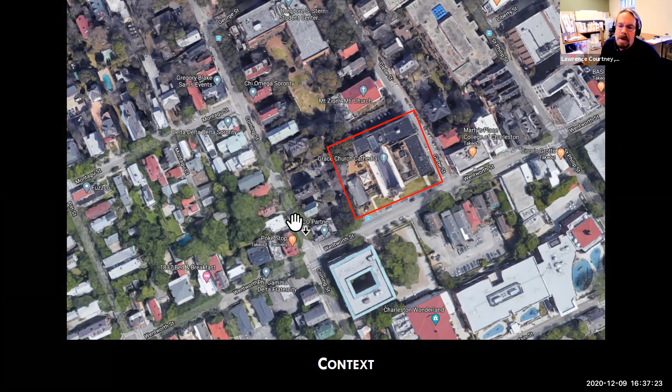Some context photos: this area shows Wentworth on the south, Glebe Street on the east, and Coming Street on the west. This is the site of the new addition, the cathedral on the right here.

This has been approved for demolition by the board previously. Larger view of the site here, looking east on Wentworth, looking west on Wentworth. This is the site right here.

Previous staff comments: the previous motion was conceptual approval with board and staff comments, on September 9th of 2020. Previous board comments, which I will paraphrase a little here.

One board member appreciated the attention to detail and how the applicant adapted the design to show these details using technologies and models to address many of his concerns. He visited the site, looked at view corridors, and walked Wentworth Street, and thought the modifications significantly improved the project. The church is still substantially visible to the public and can be appreciated by all, even though the applicant is adding this addition on the west side.

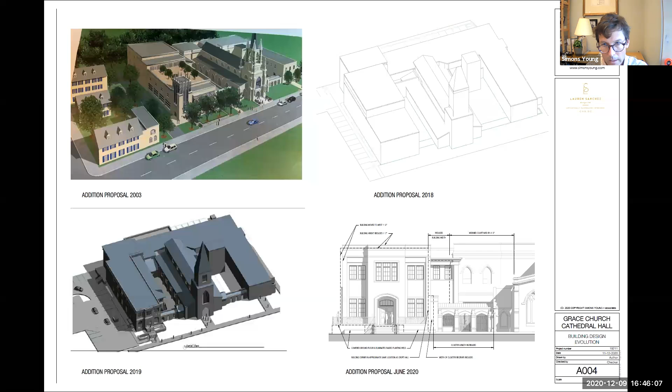Sheet 4 shows the evolution since 2003. Sheet 5, we can skip to the next—that's the diagram showing the new building and its relation to the campus, its massing, and how it completes the composition of the buildings.

On sheet A100, the site plan shows similar information. You can see Croft Hall as the dashed line there in the middle of the Cathedral Hall—that's what's being demolished. Parking is on the left, and also on the northeast side of the campus and upper right. And then the playground for Grace Little School, which is housed in the older part of the building, and also used for Sunday school.

Sheet A100A, the landscape plan, shows the courtyard hardscape design. We do have a landscape architect with us tonight if you have any questions. The idea we want to show, which you haven't seen yet, is that we're going to put some trees in front of the new building, similar to what's in front of the Johnson building, probably some crepe myrtles, and a full canopy shade tree will go in the playground.

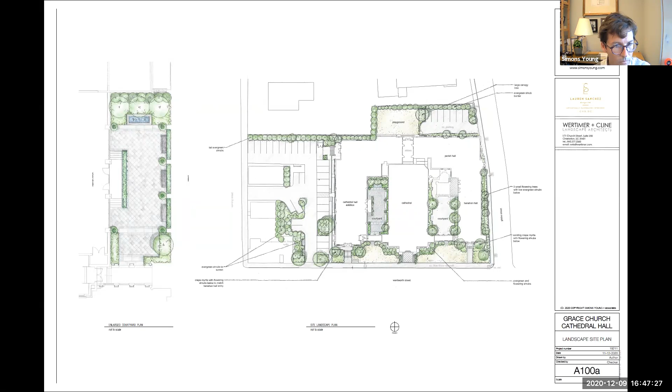Sheet A101 is the first floor plan, showing Cathedral Hall with the alignment of the main windows and columns with the stained glass windows of the cathedral. So we're translating that original design of the cathedral through the Cathedral Hall. The service functions are in the rear, there's a landing out front, and an ADA ramp going to the front and rear. There's a one-story section of the building where the kitchen resides—it gets shorter as we get closer to the cathedral, which is generally a strategy to be more deferential to the cathedral as you get closer to it.

Sheet 102 shows offices for the administrators and the clergy. These are moving onto campus with this plan—currently they're on another block down the street, so that's a nice thing for the church. There are accessible facilities to serve the second floor, and a clerestory space that looks out on the cathedral, speaking to the importance, from inside the building too, of picking up the cathedral and using it as the main feature of the building.

Sheet A103—oh, I'm sorry, on 102 there's one more thing. There was a roof, which we're now turning into a roof deck off that conference room. We'll look at that in elevations and street views—that's in the model, and it'll be most useful to see in a section.

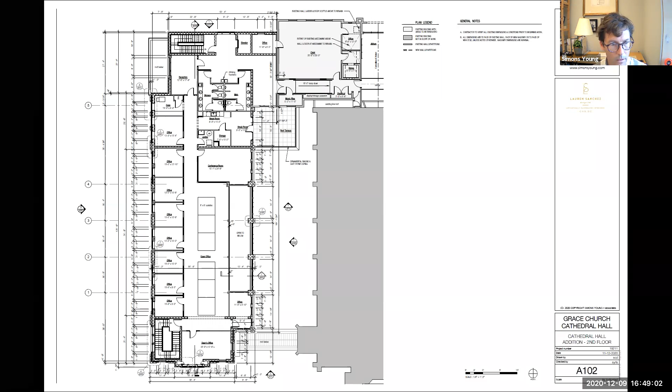Sheet A103: okay, so there are the mechanical screens—we've pushed them as far away from the street and as close to the center of the building as we can. There's a simple detail on the upper right-hand side showing the aluminum mounted on galvanized posts. Sheet A200—yeah, great, the streetscape showing the massing of the building.

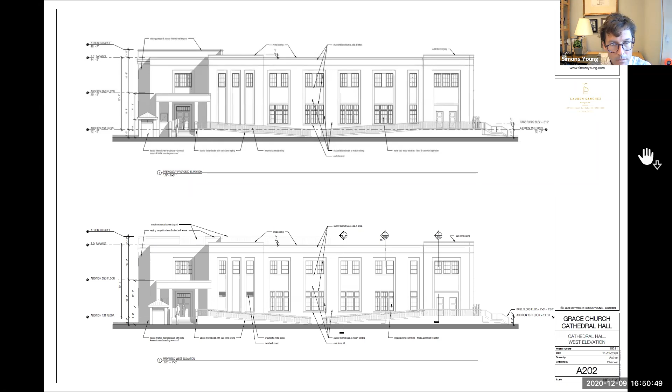Sheet A203. The section and the east elevation.

There is a change to the material, the cornice on the lower roof. It changed to metal; it was previously stucco. We changed it to insulated metal panel like an Alucobond. We propose a matte finish and a color to match the stucco. We're working on how long those sections can be, but at least 8 feet, trying to minimize the joints. Our design intent is to use a lighter material that's typically used to span, something like metal, instead of stucco that's more associated with masonry.

This whole portion of the building is its own individual design element. It's a double height space, so we're trying to make it distinct from the main building. It evokes the side porch or piazza design, which has a beam at the top that goes between columns, and it draws on some classical proportions.

You can see the roof terrace and the raise in height. We are adding a glass and metal railing and trying to keep the parapet of that roof low for reasons we'll see in a second, mainly just to keep it minimally visible.

Sheet 204 shows a section through the building and how the building relates to the courtyard and how the volumes of the new space work. The roof terrace in the distance can be seen with the low parapet wall and that glass and metal railing I was talking about.

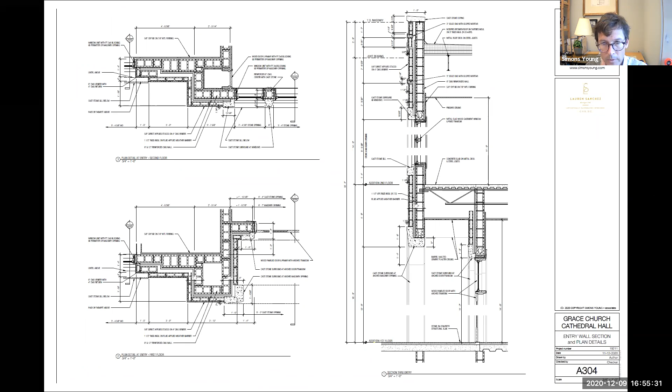This is a section through the front entry. You can see some of the cast stone items that we're using that are also on Johnson Hall.

Sheet 305 shows the whole section through the low roof curtain wall space. It's a 2-foot base, a 23-foot high section of glass and column in different places, and a 3-foot overall cornice height. In other words, it's a base that's roughly 1/10 the height and a cornice that's roughly 1/7 the height of the column. That 1-to-7 relationship turns up a lot in classical proportions, and that's why we're setting our cornices and stuff the way they are, and entablatures and all that.

Sheet AA1, I think the rest of this stuff is going to be real quick. These are just details that we're going to try and match. They're throughout the campus, the lights and rails, and you'll start to see those show up on the final drawing on the next set. Sheet AA2, these are views that we talked about a lot previously.

Sheets 2, 3, and 4 are all about how much of the cathedral you can really see, although they do good renderings of the building itself.

Okay, and then I'm going to switch to this model and then I'll stop talking. Okay, so bear with me while I take this model around.

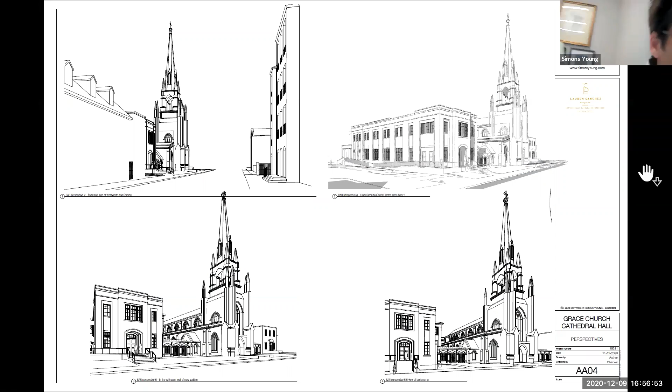Okay, so that's just sort of the overall view of the thing. This is the Glenn McConnell dorm. I've already gone ahead and removed that.

The way my camera works, we're about, in my estimate, 16 feet off the ground here at the sidewalk, and if I move back off the model, that puts us closer to like 6 to 8 feet.

So anyway, the main thing that I want to use this for, and we can also use the sections on sheets 204, maybe 203 or 204, to look at this. Let's get those up on the screen, and then this back roof. Actually, it's one more—can we go one more forward?

Yeah, there we go. So you can see that the upper rail and the eave of the lower side aisle of the church are relatively close to each other. So where you can see the roof of the church, that's when you see the rail.

I've lost my camera somehow. But can you all see? Can't see what I'm showing you.

There we go. Okay, so back here, this is that roof deck. This is it from the street. You might see a little bit of that. And that's where it is.

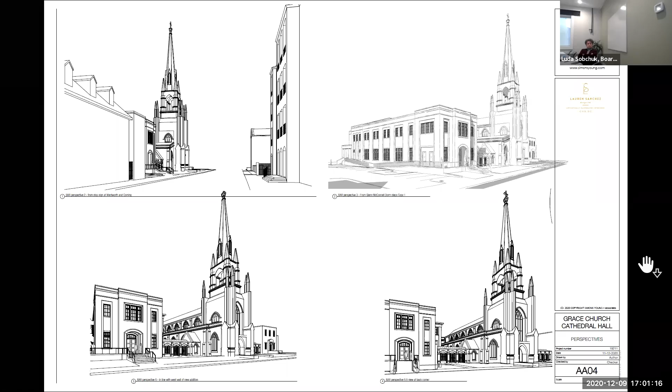Good evening, this is Justin Schwebler from the Historic Charleston Foundation. We would like to continue our support for this proposal. The applicants have been very responsive to BAR and HCF comments, and we feel that they have created a complementary and high quality design, and we recommend preliminary approval. Thank you.

Any other public comment? All right, if not, then no staff written public comments. Okay, great. Any staff recommendations, staff comments? All right.

Comments include that it should be noted that this project has an issue which needs to go before BZA-SD. This was scheduled to happen last week but was deferred due to lack of a quorum. Because of notification and scheduling issues, this meeting cannot occur until January 6th. Department staff is very optimistic that this issue will be successfully resolved at that time, resulting in no change to the design presented here. Otherwise, we wouldn't be wasting your time.

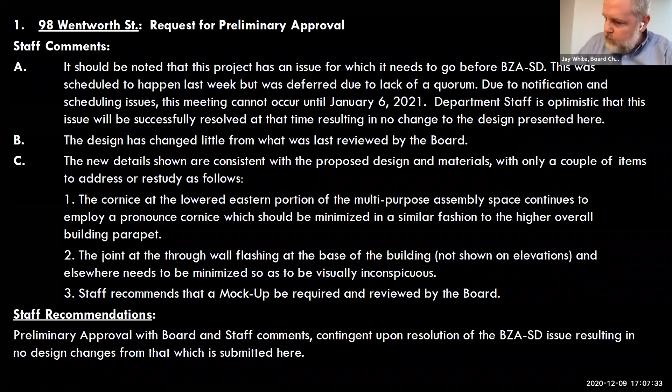Anyone else? This is Luda Sobchuk. I actually have a quick question. The Alucobond and the glass railings, it seems like they're used on the platform addition. It's a question, but also a comment—it seems like those materials are foreign to the rest of the building. What is the reason for Alucobond specifically?

We started with it as a metal cap with stucco, and metal cornice with stucco. Then we changed the stucco to Alucobond in order to have something that resembled metal more, a material that would span between columns rather than stucco, which in my mind is more related to masonry. Okay. I guess that glazing, glass railing, and Alucobond may need to be represented on the mock-up so we can understand a little bit better, at least me, how that works.

Simon, this is James. Do you anticipate visible flashing that is not seen currently in the plans?

Okay. Any other comments or a motion?

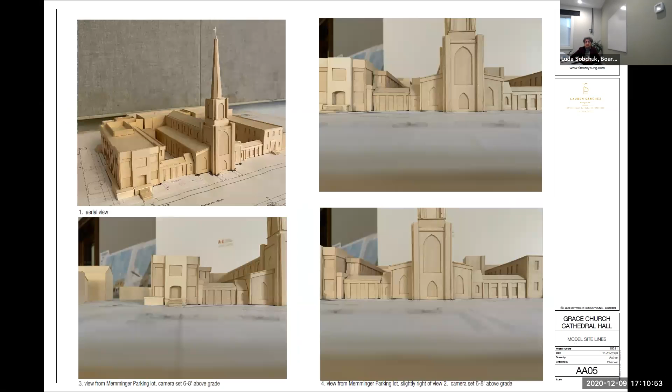This is Luda again. This 5-inch you mentioned to add to the height of the building, I guess we need to address that. Personally, I don't have any issues with that, so we may need to make sure it is in the motion. Thank you. Yeah, that's correct. It should be, and I'm fine with that rather small adjustment to the plan.

So Jay, I'll make a motion for approval, including staff comments and board comments.

This is Leon Scott, I will second. Okay, so that's a motion made and seconded for preliminary approval with board and staff comments, made by Mr. Metters, seconded by Mr. Scott. Ms. Sobchuk, how do you vote?

Yay, in favor. All right, Mr. Scott, yay in favor. Mr. Metters, yay in favor. The chair votes likewise. The motion carries 4-0. Thank you for your time and consideration.

Okay, item 2 on the agenda are buildings, including 363, 367, and 369 King Street. Applicant is requesting conceptual approval for new construction of a 7-story student housing development behind 3 existing historic structures, requesting 1 additional story for architectural merit and context.

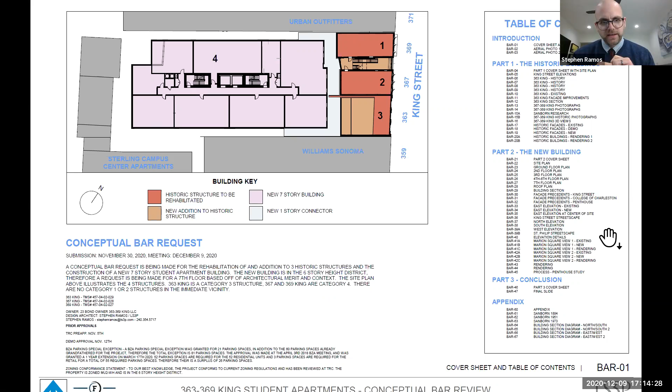Mr. Ramos: Good evening, my name is Steve Ramos. I'm an architect with LS3P, and I'm presenting on behalf of the owners of the property. I'm really excited to be working on this project. It is a real tour de force in that there is a large amount of retail, a large amount of student housing, and a total of 4 different buildings that are part of this assembly.

3 of which, that you see on the right, are historic buildings that I think are going to be exceptional. They have not been maintained very well, but with this project they will be getting that polish that is much needed. And then there is a new building being built behind those, which is building number 4 that you see on this site plan here. Because there are 4 structures, I've got a lot of slides to get through, so like Mr. Young, I will certainly need more than 10 minutes, but I will be swift and concise.

Next slide. This is an aerial photograph. You can see King Street in this photograph. Marion Square, just to get you acclimated, is at the right there, and the site is highlighted in red. The historic buildings, of course, front on King Street. There is a red dashed line there that indicates the extent of the historic pieces of those buildings, and so the new structure is going to occur behind those.

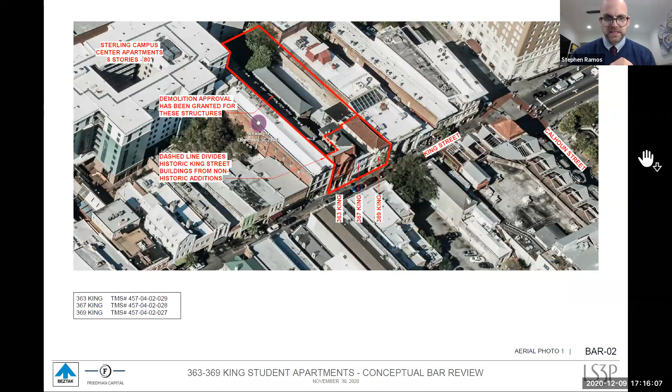For some of the board members who've been out on site, it was only about a month ago where we were approved for demolition of the non-historic structures, so a lot of you are already familiar with this site. Next slide.

This is another angle. One of the very unique things about this site is that it is landlocked. The new building being built is surrounded on all four sides by existing structures—3 of the sides by historic buildings—and in the foreground there's a newer structure, the Campus Center student apartments, which you see. Next slide.

I'm going to start first by focusing on the historic buildings, and then we will move over to the new building. Next slide.

Here's a photograph of those existing structures.

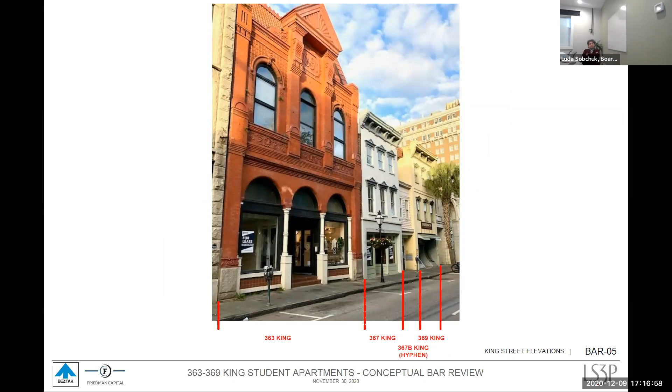So 363 King, this is really, I would say, the jewel out of the three in terms of the architecture, I think is really exceptional. One of the really awesome things we uncovered with the help of Historic Charleston Foundation's archives was an article that talked about the original building, built in 1891. I've highlighted some of the really interesting details noted in this article. It was originally the C.P. Poppenheim hardware store, really nice hardware store. The facade is made out of terracotta and what was referred to as Philadelphia pressed brick.

The entrance portal was supported by wrought pillars set upon Winnsboro granite. Currently those pillars are wood and they're sitting on stucco bases, so it's our intent to bring back the granite pedestals as well as bring in new pillars. We interpreted that they were potentially cast iron, so that's what we're proposing as part of this design.

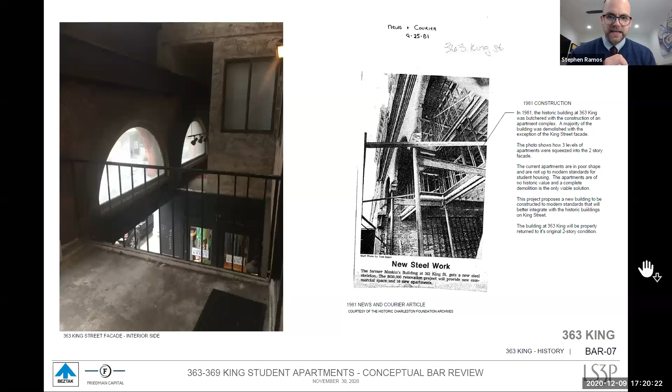One of the best things we have to go on was that article I mentioned. So this is just kind of a general outline of the improvements we'll be making. We'll be taking the stucco piers and replacing them with matching Winnsboro granite, which is from the state of South Carolina. We're recommending replacing the wood columns with cast iron columns. The existing knee walls, which are ceramic tile, we're going to be replacing with a wood paneled look that you would see in Charleston. The steps will be removed and the building will be restored to its original 2-story form.

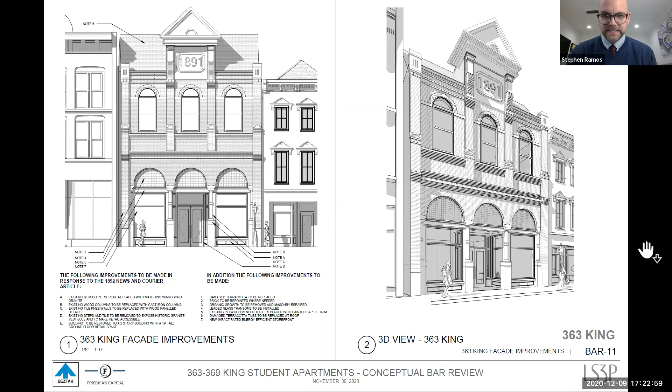Moving on to 367 King Street, we're going to be really replacing this storefront. The detail is fairly minimal and a lot of the wood is rotten. So we will be keeping the geometry that you see here, but all of the woodwork will be replaced with some hardwood like sapele that will be painted, and we'll really be goosing up the detail level on this storefront as well.

On the left, you see what we refer to as the hyphen. That hyphen will be the new front door to the student housing complex. At the BAR, we were granted approval of demolition of the hyphen, with the exception that we propose we keep the cornices, which are historic. Everything you see in wood siding was built after 1973 and is not historic. I'll show you some more backup on that in a moment.

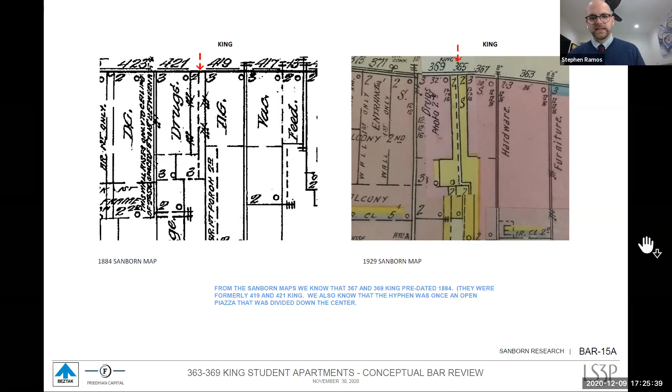This is a three-dimensional image. You have the existing conditions on the left and the new proposal on the right. Probably the most transformative change would be the hyphen, which is really kind of a Frankenstein design right now. We're proposing a much more open and glassy entrance. But one of the best things about it is it's going to expose and make visible the sides of the existing historic buildings, and you'll have a little atrium when you enter into this new building. On the right, you can see 369 King Street, where the wave facade has been replaced by a wood and glass storefront.

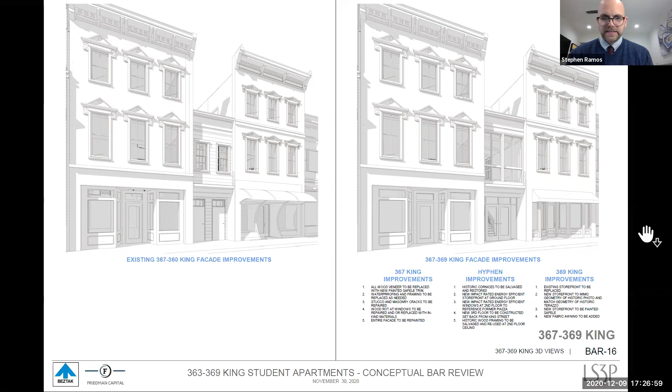This is what the new facade will look like. I should point out that the hyphen will now be 3 stories, but that third floor is pushed back over 15 feet to a distance where it's really marginally visible, if at all.

Here is a 3-dimensional rendering of what the new streetscape is going to look like. It's going to be a tremendous upgrade. I'm really excited about 363 King, it's just going to be a striking storefront. I'm also really excited about the hyphen.

You can see a different angle here, and the benefits in that kind of translucency that the hyphen creates, which is going to be really, really great. You can also see in this image the storefront for 369 King and that concave, faceted design.

Okay, so those were the 3 historic buildings. Now I'm going to present to you the new building. This is a new 7-story structure that will be student apartments for the College of Charleston.

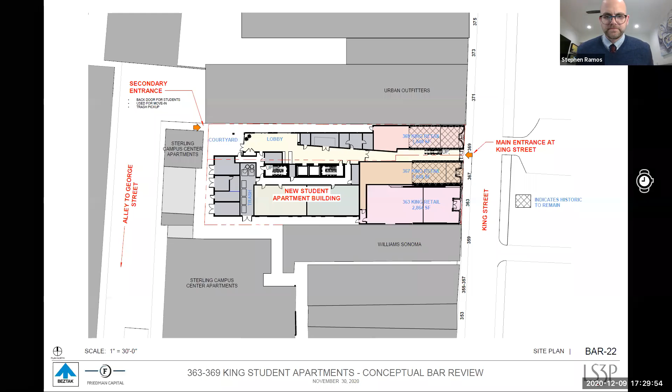This is an enlarged ground floor plan. You can see again the retail on King Street, the narrow entrance to the lobby. There are a few apartments at this level, but it's primarily support space for the building.

This is what level 2 looks like. It is all apartments once you get to level 2, as well as in the historic buildings along King Street, where we will have apartments above the retail. There is a gap of approximately 10 feet in between the historic buildings and the new building.

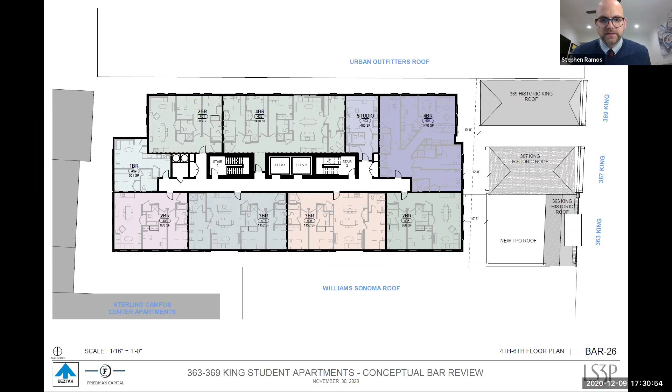Level 3 looks pretty much the same as level 2. Levels 4, 5, and 6 are identical.

And this is level 7. I suspect we'll talk about this a lot because we are in the 6-story height district, and as such, to be able to do a 7th floor, we need to get approval from you all based off of architectural merit and context, which I'm going to talk about when I talk about the elevations.

But this is the main amenity floor of the building. We studied this floor very diligently and made a footprint that was very minimal and set back as much as possible from King Street. What you're going to see in the next images is that it's marginally visible, but it will create a nice space for the students as well as a nice top to the building.

This is the roof plan. On top of the amenities, we are going to have a green roof for the building, which I'm really excited about - it's one of the many ways to deal with stormwater. You won't be able to see this unless you maybe go into the Francis Marion Hotel or the Bennett Hotel, but it will be a nice feature for the building.

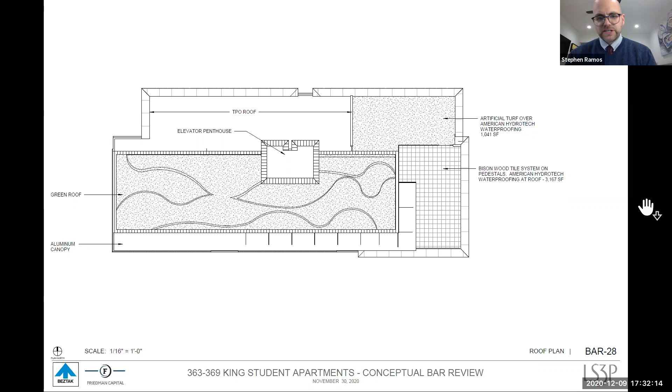Now I'm going to talk about the inspiration for the design of the new building. We always look to the immediate context to pull cues from the architecture. We have two really exceptional facades here in the Williams-Sonoma building and the building at 363 King. Some of the items worth noting were the vertical proportions of these facades, the fact that they have masonry and that they've layered the facades, and these really articulated window surrounds. The tops of buildings along King Street are exceptional, with really articulated cornices, as well as little pop-ups on the top of the roof, which add to the streetscape.

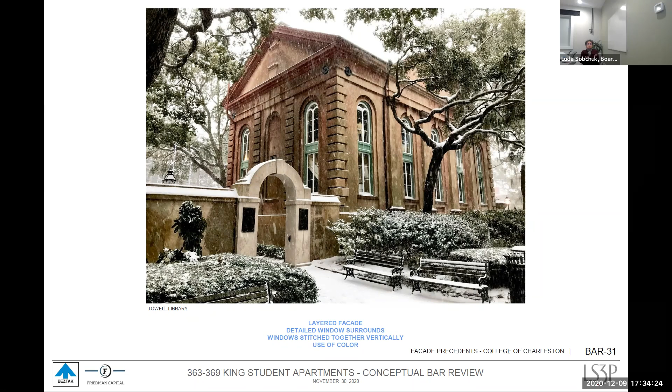The penthouse and how we clad that was something that we studied again ad infinitum. I really appreciate these copper and glass penthouses that you see in Charleston. Copper is just a wonderful material, and that's what we were proposing that the penthouse be clad in.

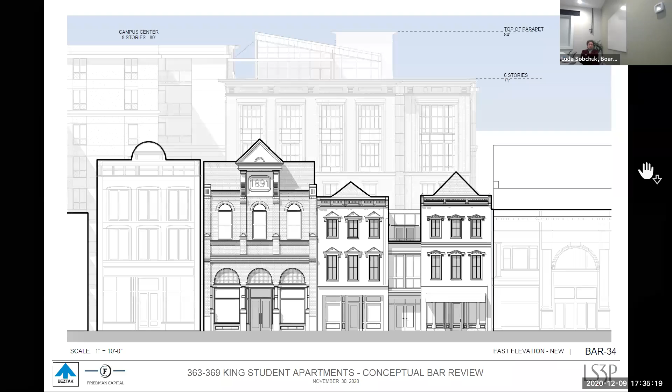And this is the building that we are proposing. So the predominant form of the building is 6 stories, and then you see the penthouse roof that sets back. Some of the items I mentioned earlier about accentuating vertical proportions by tying together multiple levels of windows, by adding additional detail at the tops of the building where it is most visible.

If you could peel away those King Street facades, this is the architecture that you would see. The building is to be clad in brick. I like working with brick because you can do a lot with corbelling to get layered details. So the window surrounds are going to be made of corbelled brick, as well as many of the components of the cornice. The penthouse that you can see will be clad in copper and will be highly glazed as well, to almost be like a lantern on top of the building.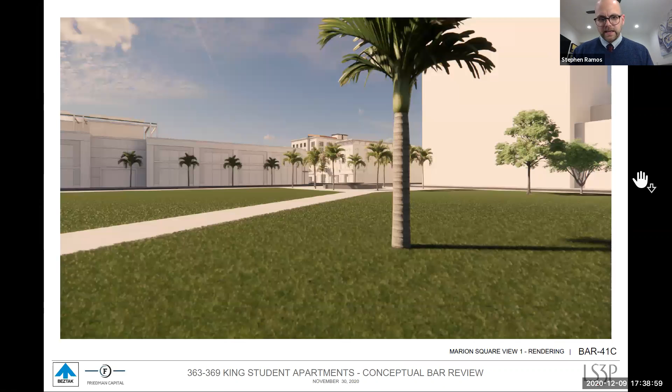So in this slide, you'll see a rendering, and again, so that you can actually see the architecture, we've kind of pared down the trees. You can see that the top of the building, the 6th floor, would be visible, but the penthouse itself is really marginally visible. The elevator overruns are really what you would see.

And then here's a rendering that shows the new building.

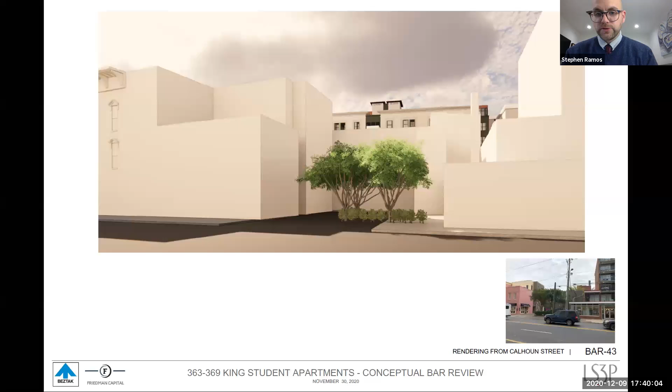One of the vantage points you will see, the 6th floor and the elevator overruns, is along Calhoun Street. If you see the photo at the bottom right, there's a little break in the buildings, and so you just will see the 6th floor and the top cornice.

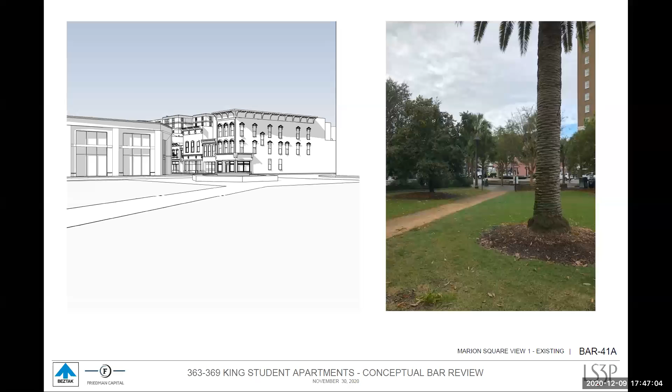Regarding the penthouse, while we agree it's an interesting feature, we feel it's overly tall and does not enhance the design of the overall building. Our primary objective is to urge extreme caution to the BAR in weighing this decision. Additional height for architectural merit and context is reserved for the most exceptional cases and should not be awarded lightly. In fact, the board has the authority to reduce buildings by a half story, and given the proximity of this building to Charleston's most significant historic commercial street, we encourage you to have a conversation and consider that. Generally, we feel the project should be deferred for restudy of the height, mass, and impact of the building on King Street. Thank you.

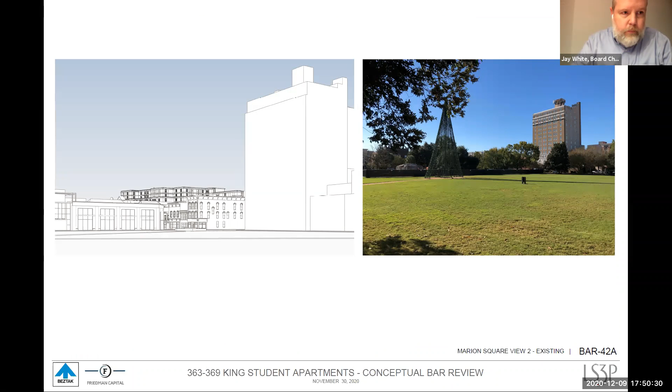Okay, well, buckle up because there are a number. I will proceed through these as swiftly as I can, understanding that most of them are relatively brief to begin with. Oh, I might have accidentally closed them. Bear with me for one quick moment. I apologize. My Adobe Acrobat flaked out on me in the middle of the meeting, so I had to restart it, and in the middle of that, I lost the compiled comments. Here we go.

All right, these are all in reference to 363 through 369 King. From Dick Downey of Bowling Green, Kentucky: I am a member of the Preservation Society of Charleston, and I oppose the applications for additional height of this project. There's insufficient showing of architectural merit and context. The historic nature of the surrounding property should be carefully weighed. Thank you for your consideration.

Then from John Kennedy, Coolblow Street: the 5th and 6th floors are the only redeeming qualities of the new building. Floors 1 through 4 are incredibly lackluster. The 7th floor being requested based on architectural merit is disjointed from the floors below. This is easily visible from Marion Square and should be better integrated. The new building reads as 3 separate buildings with no architectural connection between them.

From Christine Greenleaf in Summerville, South Carolina: Thank you for allowing me to comment on this. I'm not in favor of the additional story for the student housing development.

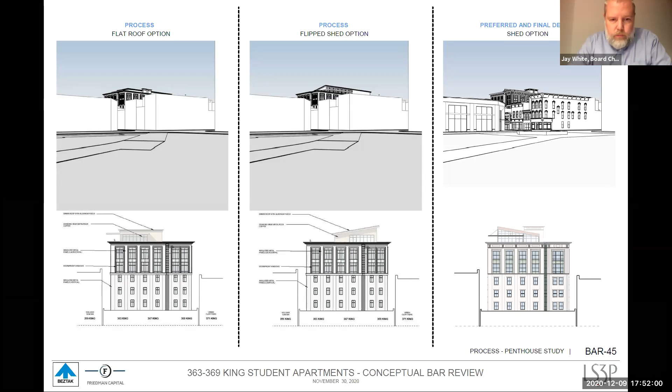One additional floor is not going to make a big difference in the quantity of on-campus housing. This is not worth further changing the traditional view of King Street and its skyline.

From Kathleen Rivers on Atlantic Street: we continue to cook the goose that laid the golden egg. As a resident of this beautiful city for over 40 years, it saddens me to see enormous challenges of flooding, parking, traffic congestion, and other issues. I urge the BAR to examine extremely carefully any and all proposals that continue to push the boundaries of the city, referring to the additional height.

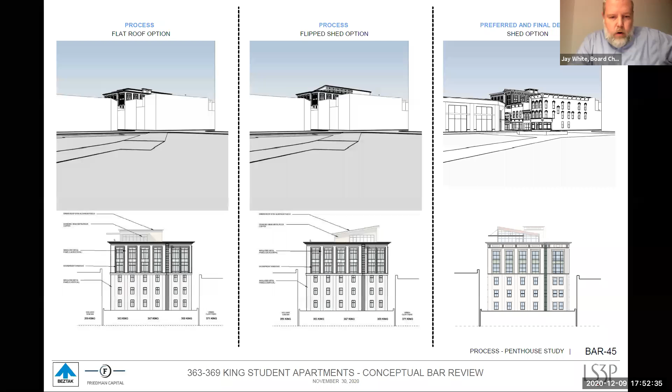Ellen Harley at Wentworth Street: I write to oppose this application as it would be most visible from Marion Square over the 2 and 3 story buildings along King Street, inevitably changing the landscape of one of Charleston's most important historic commercial corridors. Please carefully consider this request and its effect on the future of Charleston's historic district and vote no on lifting the height limit.

From Allison Owings on Elmwood: this abuse of height restrictions and the sprawling change of historic Charleston's district has to stop. When is enough enough? You're ruining our city.

From Bodane on Meeting Street: I'm writing in respect to item 2 being discussed at today's meeting. While I agree as a general principle that achieving additional density by increasing height on block interiors is a good one, and the BAR should award additional height for buildings of particular architectural merit, I think that in this instance, awarding an additional 7th story would be a mistake.

With respect to the first point, the kind of hidden height that we should promote on block interiors is not present with this project. Due to the project's specific location, it would prove disruptive from just about any angle from Marion Square, which of course is an important and historic view corridor.

I also agree that the design of the stories buildable by right within the height district have some architectural merit; they're generally attractive. However, this does not seem to me to be the case for the 7th story. The 7th story penthouse level breaks with the context-sensitive design proposed for the rest of the building. Surely, if you're going to award a bonus floor, that bonus floor should continue the architectural merit that got it awarded in the first place.

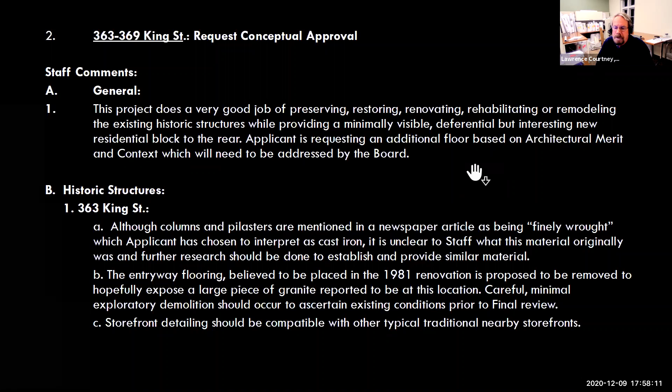At 367 King, little change is proposed here. Any necessary revisions to detailing should be compatible with other typical traditional nearby storefronts.

At the hyphen, as little historic building fabric exists, staff is supportive of this portion being represented as a new contemporary entry into the new residential complex, and appreciates its subtle and downplayed detailing. Any lighting at the third floor terrace overlooking King Street will need to be subdued and inconspicuous.

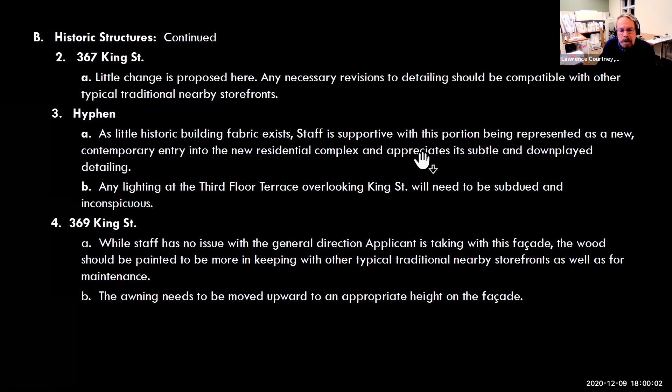At 369 King, while staff has no issue with the general direction applicant is taking with this facade, the wood should be painted to be more in keeping with other typical traditional nearby storefronts, as well as for maintenance. The awning needs to be moved upward to an appropriate height on the facade.

For the new residential block, the front of this portion of the building is a minimum of 50 feet from the building facades on King Street, and the applicant has gone to lengths to ensure that it will have little, if any, impact on King Street. While portions of this front facade will only be seen in very small parts from King Street, the facade is well composed, with the two top floors having well articulated, recessed, and well-spaced stacked windows separated by spandrel panels over the unseen bottom floors with simple punched openings.

Care needs to be taken in the detailing of these spandrel panels to avoid how they now read on drawings as heavy lines. These panel joints need to be visually minimized, and the mint color may be a little too bold. Staff suggests finding a more subtle color.

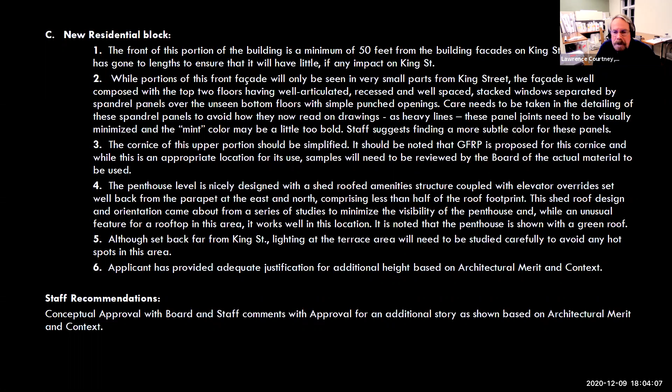Sure, I will be brief. In regards to Mr. Courtney's comments, we agree that we should get conceptual approval. And all of the detail related items about the stone and the wood and the metal are certainly things that we will continue to evolve as the project matures.

I want to thank Historic Charleston Foundation and Preservation Society for being really helpful resources to us throughout the process, especially regarding historic buildings. That has been a huge help, as well as their feedback about the new building. Although we don't necessarily agree on everything, I think it's great that we can have this discourse.

Just one comment I'll say is that a long time ago, a teacher told me that urban buildings are about bottoms and tops. So you put the most emphasis at the ground level where folks can touch and feel and really appreciate the architecture. And I feel like we're hitting a home run there with what we're achieving with these historic structures.

And then the next most important part is the top of the building, because the tops of buildings are often what form the streetscape or the cityscape. I think we've put a lot of focus and attention to what we're doing to the top of the building. Yes, the penthouse is really not visible, but that was intentional, as we wanted to really pare down the massing of it. But we feel like the detailing, the materials of brick and copper, are exceptional details and materials that we're really proud of.

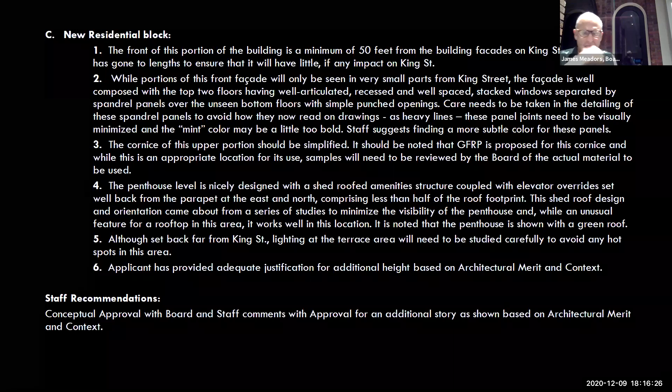Okay, any further comment or a motion?

If I may ask a question again, the green roof, what exactly is the significance of that? For this building specifically, how it's designed, how it's located, and the size of it. With the city's new stormwater requirements, it's becoming more and more difficult to meet what's required. Most people are burying a big concrete tank underground, which we're going to have to do some of as well. This is a great way to address stormwater in a more aesthetically pleasing and sustainable way. It's just an awesome feature.

Well, when it's sloped, would there be some runoff of the water? Yeah, so you have to capture it. So it's designed to hold the water. Okay.

So Jay, I'll make a motion.

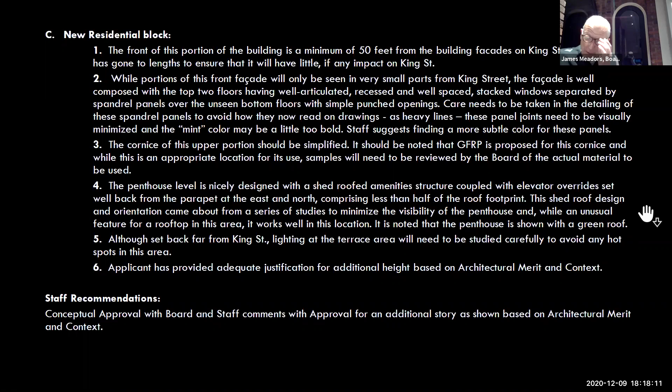And I'm torn because my instinct right now is to move to the 5.5 stories, but because of my respect for Steve, and the fact that it would be worthy for him to have the opportunity to make the building height the 6 stories.

I guess I need to ask a question. If I recommend, or if I make a motion for deferral of the application, does that prohibit us from going to 5.5 stories in the next meeting? I just don't know the answer to that, and I don't feel awkward asking it out.

I don't know, that's a good question. Yeah, I see where you're coming from. I think though, from the applicant's perspective, it's better to just go ahead and give clear and direct guidance from the get-go. Because if they get deferred this evening and they're told, well, you just can't have the additional floor, and then they go back and revise the design at significant effort, come back with a 6-story proposal, and then they're told at that point, actually 5.5 is more appropriate. I think we as a board have to just decide what direction we're going to give this applicant tonight, so that they have clarity moving forward.

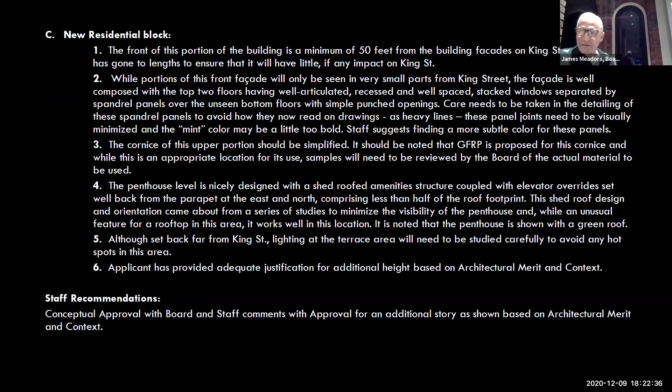Thoughts? This is Leon Scott, I'm also in agreement with the 5.5. And if... I just don't know what's the best way of doing that. Well, I think, Leon, you can just make a motion and say it's 5.5, and that's it. Okay.

So now if we make a motion of 5.5, are we deferring it, or what are we doing? How are we able to still come back with 5.5? Well, the way you would structure a motion like that is to defer the height of the project, taking into consideration board comments regarding 5.5 stories. I mean, the conversation right now would either be that height, scale—I think it would be important to address height, scale, mass, and general architectural direction somewhat separately, because we have differing concerns. We're very concerned about the height, but the massing isn't as critical, and the general architectural direction seems to get the least critique.

But it sounds like y'all are moving towards some form of deferral. And if we want to give the applicant specific direction on the number of stories we think are appropriate, we just include that as a board comment. I think actually the massing is also an issue because of the 6th story. So it's kind of halfway through with detailing and architectural direction. But if we reduce to 5.5, we will also address the massing as well.

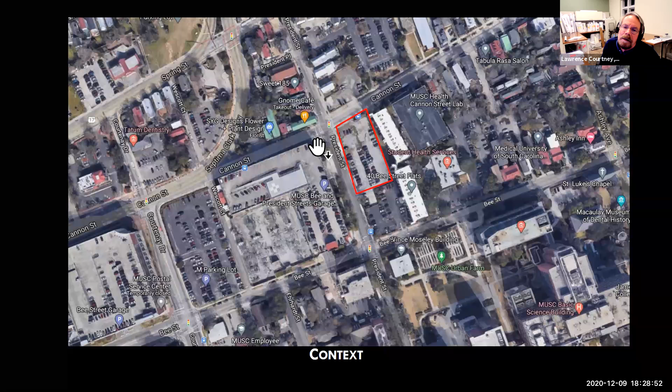Some context photos. This is the site here bounded in red, with President running north and south here, and Cannon running east-west along here. Looking southwest from the intersection of President and Cannon Streets. Same shot basically, and looking northwest from about the same spot. Looking west on Cannon.

Previous motion was deferral of height, scale, and mass, and architectural merit of the additional 6th floor, including all board comments and staff comments C, D, and E.

Previous board comments included that this is a pivotal corner—MUSC and hotel developments from the bridge, and going east is residential, which one to lead? Architecturally, it is nicely detailed, solid urban design, but hard to digest having it here. It's massive. The fifth floor could be lighter looking, and the colonnade needs to be consistent. At the moment, they could not support a sixth floor.

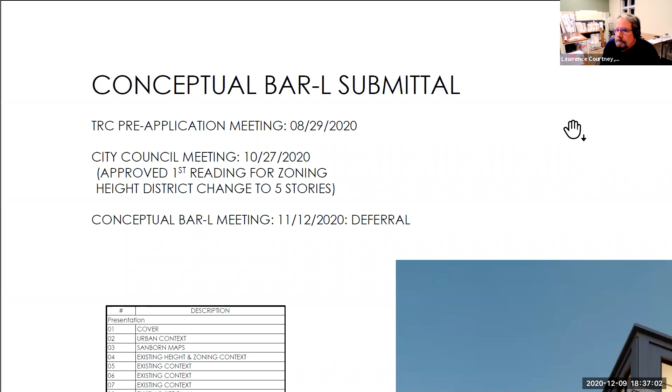Yes, this is Josh Vogel, I represent the ownership. And up here, I'm getting a text. Linda, can you unmute 843-577-2163? Yes, just a sec. Thanks. Oh sorry, got the wrong one. Hello? Can you hear us now, Carol? Yes. All right, great, thank you.

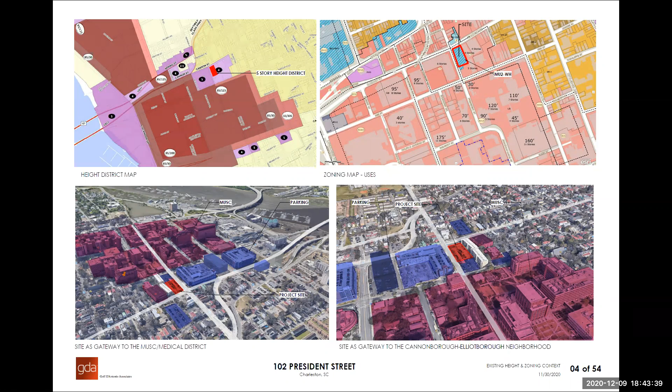Next slide, please. If we move a little closer to our property, you see the existing parking lot that has been vacant for over 30 years and wasn't able to be developed, and is an eyesore to the neighborhood. That parking lot is bordered by two broad streets, President Street and Cannon Street.

And to the north of our site, we have a drainage improvement park that is a city project that leaves a little bit more breathing space right in front of our site as well, and puts 120 feet between the north of our property and the next adjacent lower residence. Next to that, we'll expect 3.5-story future townhouses also to the north of our site.

And then to the east, we have the Bee Street Flats building that's shown at the top left of the page. This is a 4- and 5-story building that was designed as a motel and has been converted to a condominium building that is mainly renting out units.

Adjacent to that is an MUSC research building, a 4-story building that appears more like a 5-story building due to high floor-to-floor heights. And then to the south of our site, we have a paved parking lot that belongs to the Bee Street Flats property.

And to the west of our site, we have a 6-story parking garage with a helicopter pad that is covering the entire block along President Street and Cannon Street.

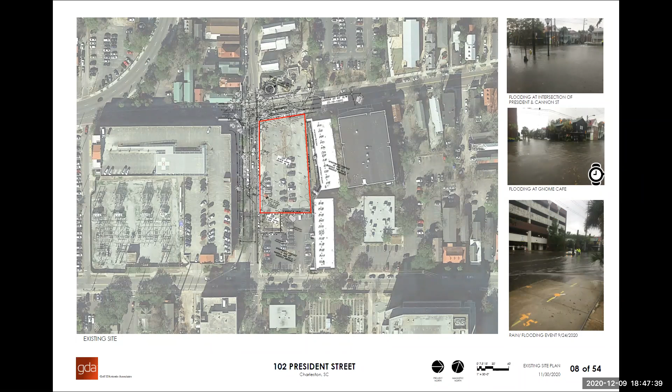The next slide shows our proposed site plan. We're proposing a U-shaped building that opens up towards President Street to break up the mass along that street.

And we are placing an active amenity courtyard opposite a parking garage, which is unoccupied. It makes a lot of sense to us to put this active space opposite a parking garage and not another residence.

To the east of our site, we have placed units and have the bedrooms of units face the adjacent residence building, which makes sense because the adjacent building, as you can see on the right, has an access corridor reminiscent of the original motel use. When you look at that facade, you enter the unit from that corridor, and the small windows you see are the windows to the bedrooms of the units.

So the units of the adjacent building have internal living rooms and don't have a focus on our site. Again, we're placing our building's bedrooms against the bedrooms of the residences to have a quiet interaction there.

The conceptual massing consists of a very active first floor, and we're using the urban feature of a colonnade to activate the street front, contribute to the public, and extend the sidewalk.

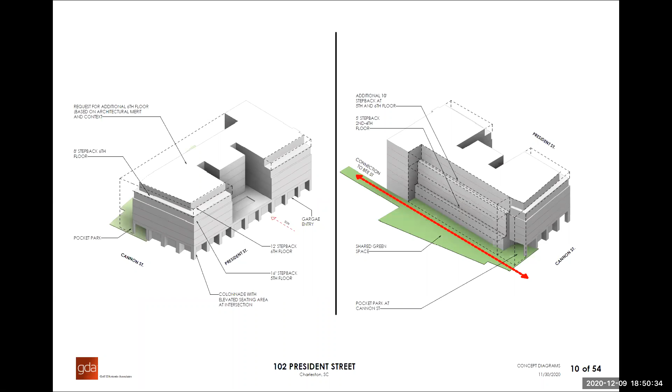We have received a lot of contrasting comments from the public and from the historic groups. Some of the comments did not support the sixth floor, while others supported the sixth floor. The BAR stated that they thought the site can support six floors, but not with the current application.

They wanted to see changes to the colonnade and to the second floor corners. They mentioned that the previous design looked top heavy and that the fifth floor could be lighter.

So we have redesigned the facade and rearranged the spacing and rhythm of the colonnade. We widened the columns and also the spacing between the columns to make the commercial space more inviting.

We have strengthened the corners, the second floor corners, to make that colonnade more bold and confident, so that it can carry the upper mass.

On the upper floors, floors 2 to 4, we have rearranged the floor plan to better work with the new colonnade rhythm. We have increased the glazing while still keeping vertical proportions, and we eliminated the corner glazing, which was a point of discussion last time. It just didn't seem to work with the strict rhythm of the colonnade.

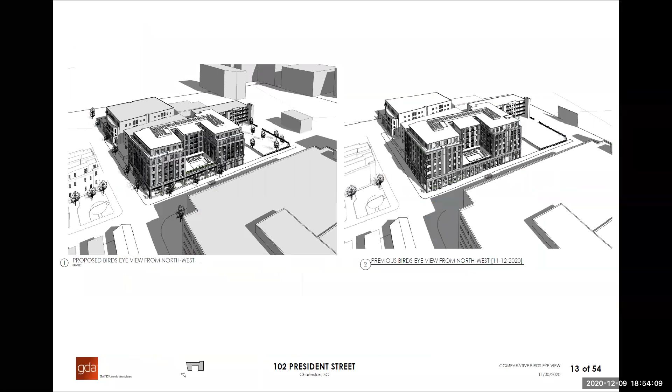As I mentioned, we have studied the setback of the 6th floor so that it is not very visible from the immediate right-of-way.

But as you move around the building towards President Street, you can actually see the full height of the 6th floor with that central tower. So we're expressing the full six stories here, have added a cornice with a wood soffit that relates to materials on the colonnade, added brackets, and generally modulated the facade and added balconies. This center tower we have also clad with an ACM panel to create a contrast to the two flanking brick towers, and it balances that symmetrical elevation on President Street.

The rest of the 6th floor is more neutral, with shading elements above the windows to further reduce the scale, but it is generally expressed the same way as the 5th floor with the ACM panel.

Our focus for the highest level of materials is on the 1st floor at the colonnade. We have created this colonnade to extend the sidewalk and create seating areas and a safe, sheltered space for pedestrians to sit and enjoy an extended public right-of-way.

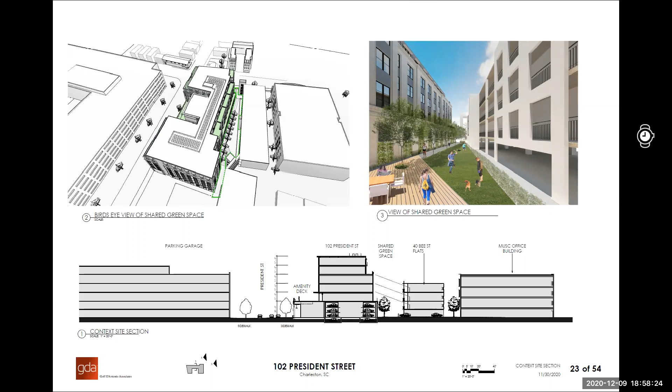On the next slide, I'll have Russ Seamon briefly talk about the streetscape improvements we're planning with the development of the site, and a few more details on the shared green space. Russ, if you could take over and briefly talk about that.

While we're waiting, if Russ can't present, I'll summarize as well. In terms of streetscape improvements, we are providing wider sidewalks with the additional 6th floor. We need a minimum of 10 feet, and we are providing 12-foot sidewalks on Cannon Street and wider sidewalks on President Street.

Kara. Oh, sorry, Russ? Yeah, I think it just took a second for me to get unmuted. No problem, go ahead. Thank you. Again, this is Russ Seamon with Seamon Whiteside. We're handling the landscape architecture and civil engineering for the site. Caro has hit on this pretty well so far, so I'll try and be pretty quick.

We're really excited about the pocket park area and the idea of potentially bringing a rain garden into that, with a deck that is over that rain garden and some unique seating opportunities, some trees that march through the space, and a lawn area for

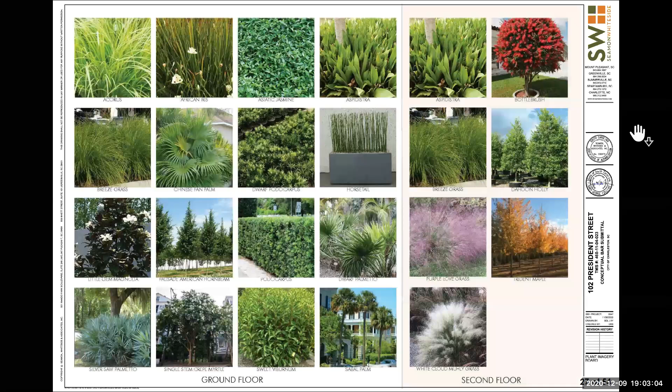This is some of the landscaping, just to show you what we're thinking. We're thinking of a real contemporary approach with clean hedges, masses of plants, using naturalized and native plants, and using grasses where we can on the roof. Next image.

And I think that goes back to Caro. Thank you, Russ. We have provided, of course, the building elevation comparisons and the floor plan comparisons, and at the end of this presentation there are also shadow studies and some sketches of the design process. I won't go through all of those. We have shown you the renderings that are most efficient, but the streetscape elevations really are interesting. If you look at this slide, how we are transitioning down from, at the very top, from the higher density MUSC district towards Cannon Street and towards the neighborhood.

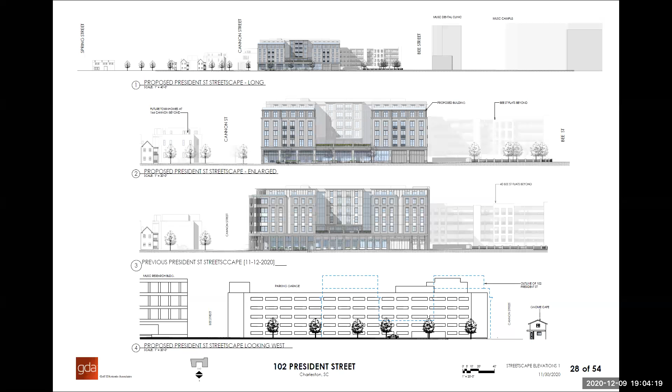And the next slide shows again the Cannon Street streetscape as you approach from West Ashley. I won't go through all of those, but I would like to just summarize our design approach and the architectural merit that we are requesting for this building, or the additional 6th floor.

If you could go back to page 14, Lauren. So we have shown you that the context is a transitional context, and we feel that this site should be a gateway building. We have made the adjustments for the board comments from the last time, and we think we addressed those comments.

Our 6th floor, we have studied that a lot. We have studied step backs a lot, and we are celebrating it in the center of the building, but we are stepping it back from the right of ways. It actually covers about 67% of the actual first floor building footprint, so it's not a full sixth floor.

But in terms of our contribution to the public realm, I'd like to summarize again what we're doing with this project. First of all, we're converting a gravel parking lot into an attractive new gateway building. We're improving the streetscape and walkability in this area by widening the sidewalks, adding street trees, and adding street lights. We are introducing this urban feature of the colonnade with high quality material that extends the public realm into the building and creates this semi-public space.

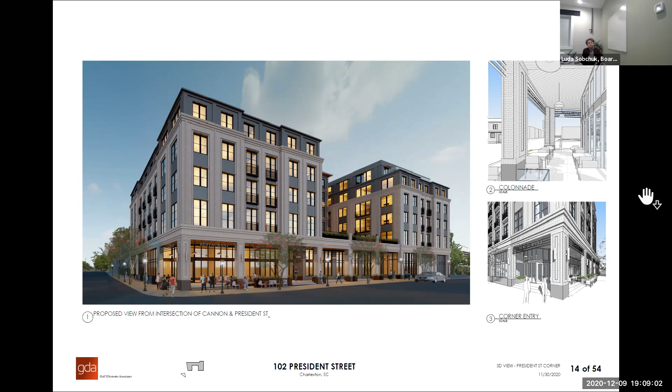Okay, any other questions? If not, we will move on to public comment, starting with the in-person commentary, and then I've got several letters to read in. Jay, I think we were going to start with the letters and then go to the in-person commentary. Okay, let me flip over to that. All right, so here we go.

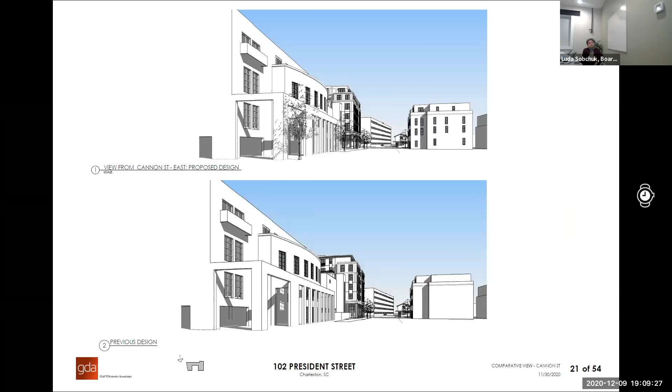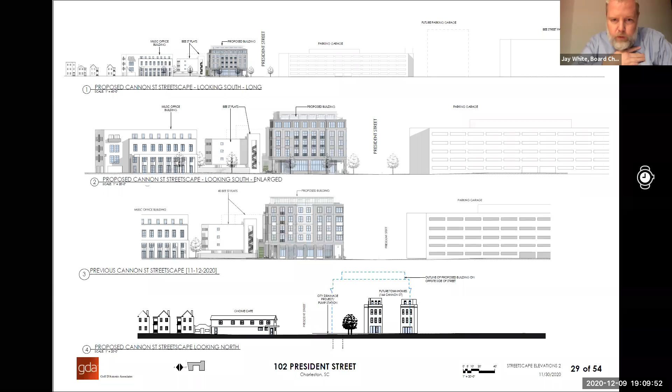There are a number regarding 102 President Street. Thank you for the opportunity to submit our comments. We own property next door. Having reviewed the proposed structure, I am concerned with the following: one, the overall size of the project is simply too overwhelming from this corner. Two, given that most of the neighborhood homes are 1 or 2 stories, I'm concerned about the height. Three, this very large footprint of this project is too large to warrant a 6th floor. Four, I don't understand why the side facing Bee Street appears to have no setbacks. I'm not sure if that's accurate. It does not match the architecture of the rest of the building. Jeff and Amy Marks, 40 Bee Street. This from James Lindley on Oakwood Drive.

Thank you to the board for considering public comment on this project. I'm a homeowner and board member at 40 Bee Street Flats. I was among many who voiced a concern for how a large project like this, given the massive footprint and unwarranted height, would be overwhelming for this part of the neighborhood.

It would loom over the street, our own condo building, and our single-story and two-story neighbors. The southern elevation that faces Bee Street has no tiered stepbacks like the other sides—it's simply a straight 6-story wall. Cannon Street's north elevation is not much different, with only a minimal setback. The mass and height of the project remain exactly the same, just with a few changes on President Street to aid in the claim that a 6th floor isn't noticeable.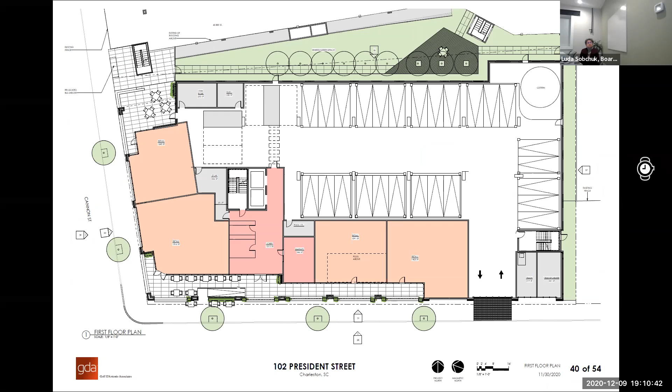The pictures in the presentation show otherwise, as the 6th floor is very noticeable from all vantage points on the street. Please deny, not defer, this attempt to add a 6th floor. Please deny the project due to its mass and scale.

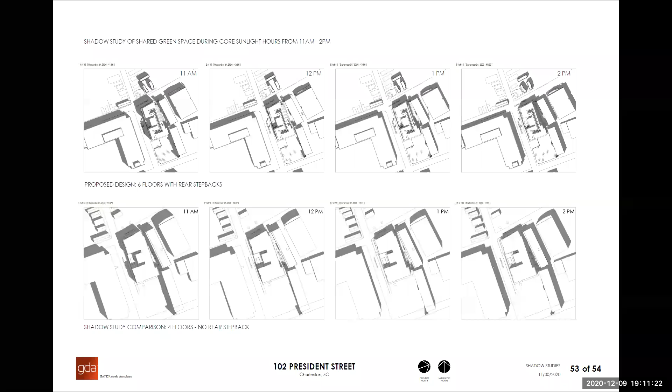Now, Robert Hager on Paul Revere Drive. My name is Robert Hager, and I'm a lifelong Charlestonian. I bought a condominium at 40 Bee Street Flats and use it for personal office space. The proposed building for this parcel is extremely massive and completely overwhelms the corner of President and Cannon. Please consider the effect this building is going to have on the owners of 40 Bee Street Flats and the overall effect on the adjoining public realm.

Many times while building in this beautiful neighborhood, I would frequently hear the word scale and the importance that buildings have on the public realm. So to sum up my comments, the proposed building is totally out of scale.

Phyllis Westberg, 40 Bee Street. I own 121 40 Bee Street Flats. The proposed 6-story mammoth building dwarfs the neighbors, blocks sunlight, and creates a presence which utterly destroys our neighborhood. Not to mention significant traffic congestion. I strenuously object to its in-your-face proximity to me, its huge 6-story height, and its massive size. Please deny permission for this size building and preserve our residential neighborhood.

William Olasov at Arabian Drive. My wife and I own a unit at 40 Bee Street. The proposed building at 102 President would be a tremendous detriment. 102 President as proposed is just too big for the site and would not fit with the surrounding properties. The size, height, mass, and positioning so close to the property line would allow 102 President to loom over 40B, diminishing value and appeal.

Luke Fisher, 11 North Road, also an owner at 40B. The height, scale, mass, and close proximity of this project will dwarf our buildings and our neighborhood, and I believe it will negatively impact the quality of life of our residents. The rezoning from 4 floors, previously allowed, to 5 floors, now allowed, as well as the request for a 6th floor in this current submittal, creates the potential for a project that does not fit the current character of the neighborhood. Kelly Rainwater—we own a unit at 40B and strongly wish any new construction not exceed the scale of the existing structures to maintain the character of the area.

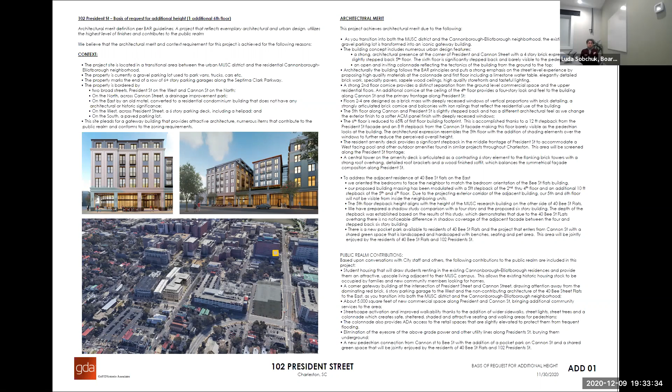Hello, can you hear me now? Yes, hello, this is Andrew Gould. I've been working closely with the applicant and the Neighborhood Association, helping to refine this and helping to gain the support of the Neighborhood Association, and helping people understand all of the ways in which this project is beneficial to the neighborhood, which it really very much is.

This corner needs this so much, this unfortunate intersection, and to have all of this housing and all of this retail, it's going to liven up this corner tremendously, which will have a great effect on the scattered commercial life of that end of Cannon Street.

Architecturally, this is such a great urban building. The C-shaped massing, the height of it, it's really in scale for the big intersection, one of the widest intersections in the city, I think. And it amazes me that people suggest this building is out of scale with its surroundings.

Just looking at the aerial view on our screen right now, you can see it is very similar in scale to all the buildings around it, and it's much, much higher quality than all of those buildings. I supported this building last time the board saw it,

and I support it far more strongly now. There were some real problems with it before. The corner glazing was quite awkward, the colonnade was awkwardly spaced. I think all of those problems have really been solved with regards to the conceptual massing now.

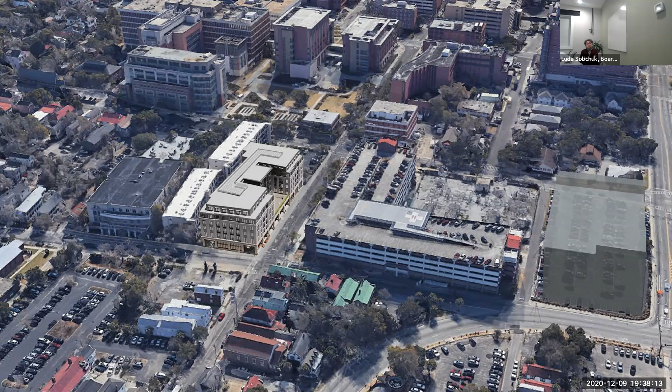So I would really encourage the board to consider that this does meet a reasonable test of that standard, and to consider that they could achieve just as many apartments if they infilled that courtyard. They have chosen to carve out a large piece of their buildable volume to create that courtyard. They don't have to do that. I imagine if they lose the 6th story, they probably will fill in that courtyard to build enough apartments, and that would be a real shame, because it would be a worse building without that courtyard, without the C-shaped massing. So the fact that they are giving up space for the public colonnade and the pool courtyard is a gesture to make it more beautiful from the public realm, and that needs to be considered as part of the architectural merit that justifies moving some of that built volume up onto the 6th floor, where it's very discreet and not a problem from the perspective of the neighborhood. Thank you very much.

Thank you. So Linda, I think that's the end of the public comment. Is that correct? That is the end of public comment, Jay. Okay.

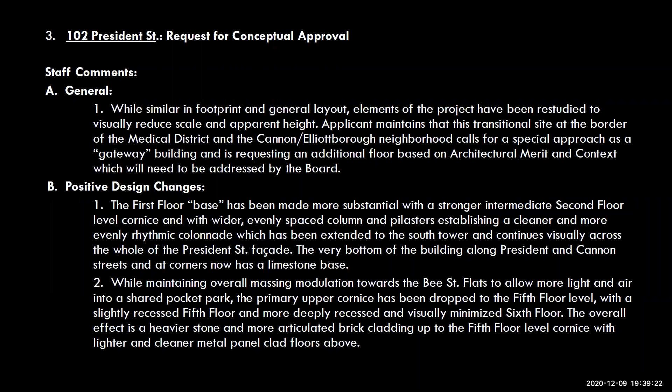Staff comments and recommendations. Okay, staff, make sure that I'm unmuted here, and it seems that I am. So comments are divided into 3 parts: general observations, positive design changes, and areas for further study.

With general observations, while similar in footprint and general layout, elements of this project have been restudied to visually reduce scale and apparent height. Applicant maintains that this transitional site at the border of the medical district and Cannonborough-Elliottborough neighborhood calls for a special approach as a gateway building, and is requesting an additional floor based on architectural merit and context, which will need to be addressed by the board.

B, positive design changes. The first floor base has been made more substantial with a stronger intermediate second floor level cornice and with wider, evenly spaced columns and pilasters, establishing a cleaner and more evenly rhythmic colonnade, which has been extended to the south tower and continues visually across the whole of the President Street facade. The very bottom of the building along President and Cannon Streets and at corners now has a limestone base, while maintaining overall massing modulation towards the Bee Street Flats to allow more light and air into a shared pocket park.

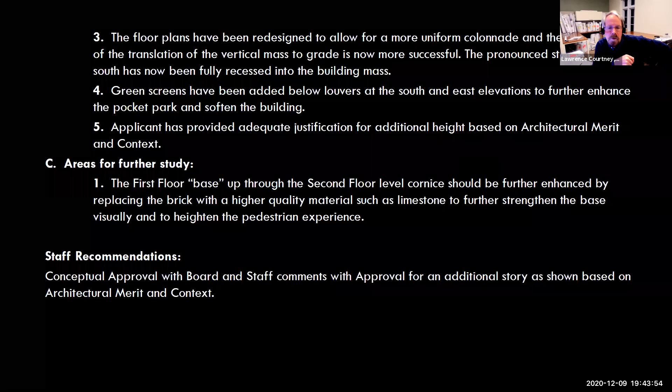Areas for further study: the first floor base up through the second floor level cornice should be further enhanced by replacing the brick with a higher quality material, such as limestone, to further strengthen the base visually and to heighten the pedestrian experience. So our recommendation is conceptual approval with board and staff comments, with approval for an additional story as shown, based on architectural merit and context.

Okay, how about a few minutes for an applicant response?

Thank you for the wealth of comments from the public and from staff as well. We have created an urban response at that site, and we have shown you in the context that that site can support an urban response and not a smaller scale residential response.

We're also understanding that many of the comments against the project are coming from Bee Street Flats. We have from the beginning worked together with them, and we're continuing that. There are 84 condo owners, so it's difficult to reach out to everybody. We have addressed, we feel, the adjacent building with our double step back.

We are proposing a shared green space that can be jointly used by both residents. That is not a public portion, but I'd like to also address that the pocket park on Cannon Street, the portion open to the sidewalk at the end of the colonnade, is public. So there is a contribution to the public realm. We think it is much better to develop the site, not leave it as a gravel parking lot, and improve the security and walkability in this area, rather than leaving it as it is, which I think a lot of the Bee Street Flats owners would prefer.

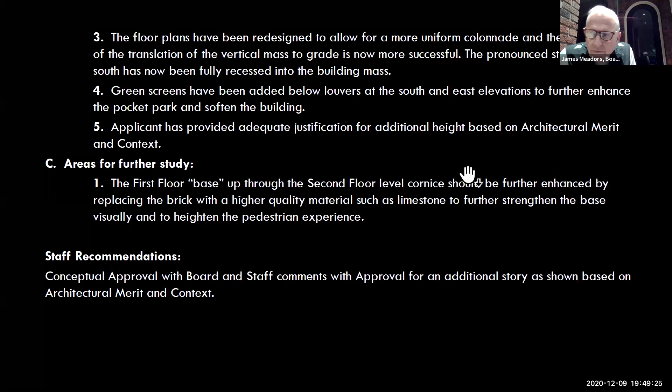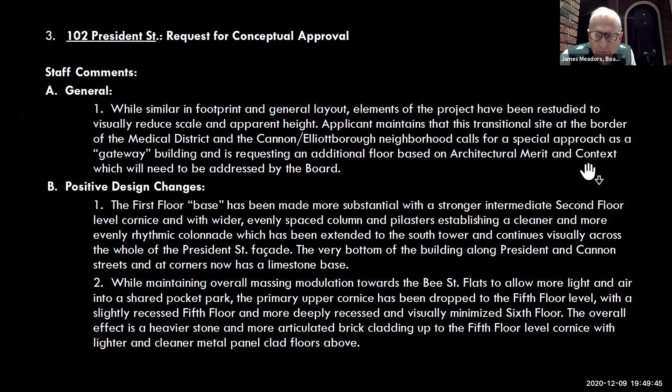And because of that, I can't support the additional floor. I want to ask Lawrence if he would go back to the photograph, which was an aerial photo, showing this building and the surrounding buildings, but you could also see the medical university in the background. And I don't know what the number was.

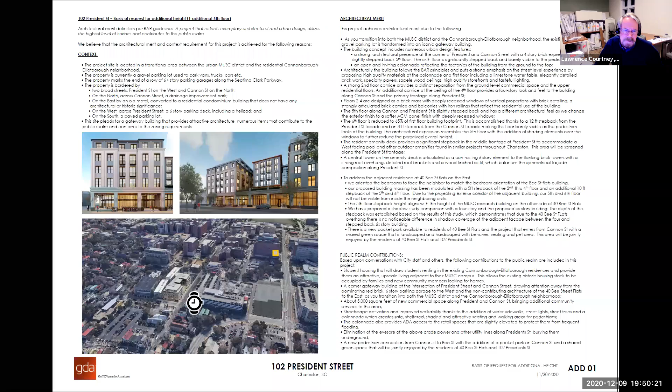Carol might be able to tell you quickly. That would probably be the last slide, the aerial with the dropped-in image. No, I mean the real photograph, an actual photograph. Yes, there was the summary of the architectural merit and context sheet. Yeah, that was it. There it is. Okay, but, oh, okay, yeah, maybe you were just zoomed in. I thought that was the one that zoomed in more. Yeah, that's great, right there, perfect.

Whether you appreciate the architecture of the medical university, if you look over at those buildings, there's a continuity. I mean, good or bad, but they blend together. And when we come down and look at the building we are talking about right now, and compare it to the parking garage next door, the small building to the east side, the vacant lot across the street, it's not similar to looking at the medical university complex.

Well, of course it's not. The medical university's got a master plan, and they're following it, good or bad. So we are introducing a new building into this environment, and there are challenges on all sides.

So it's a difficult situation. The project has to work, which means it has to have enough space in it to rent out, to get the income to pay for it. I understand that, and it's easy to take a position, but based on what point you're viewing this project from. And if you're just to the east of it, there's an eclipse that's happening, and I get that.

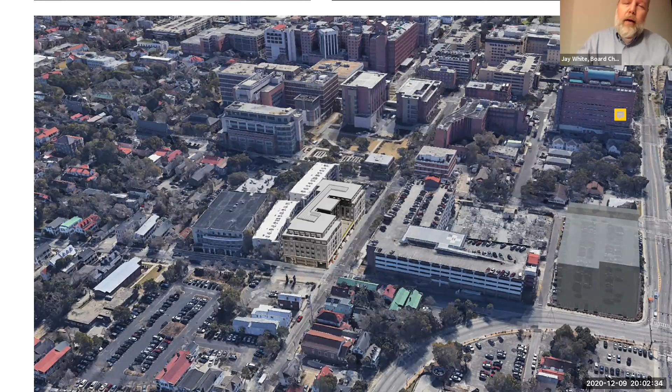Well, I agree to the extent that we're not here to design the proposal for the applicant, nor are we really here to make their case on their behalf. My read on this is that the concern is as much towards context as it is towards architectural merit. There are some contributions to the public realm with this project, certainly that's something that's referenced in the ordinance.

Although it's not a simple trade, if you give us this much park, we give you another story. There are other parts of the city that are like that. I think that there's a lot of redeeming qualities to this proposal.

Again, I wasn't here last time when it was heard, but this proposal seems like it's got a lot going for it. However, I don't see the context case being built for the additional height. And yes, I recognize that if the project does not receive that additional height, then that might mean a completely different proposal.

But that would be the applicant's response. Then that may just be what's necessary. That's what I was trying to say. You said it maybe better. I just, one thing I really want us to do, since this is the second time this proposal's been here, and this is a major project, definitely want to make sure that we're very clear on the direction that we provide.

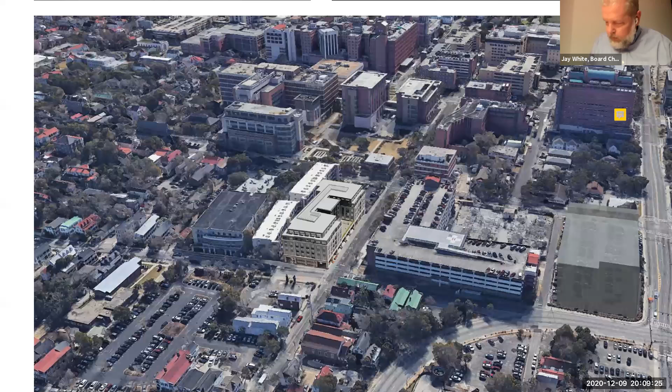All right, do we have a second on that? This is Leon, Scott, I will second. Okay, we'll call the roll. Ms. Sobczak, how'd you vote? Yay in favor of approval? Yes. Mr. Scott? Yay in favor. Mr. Meadors? Yay in favor. And the chair votes likewise, and the motion carries 4-0.